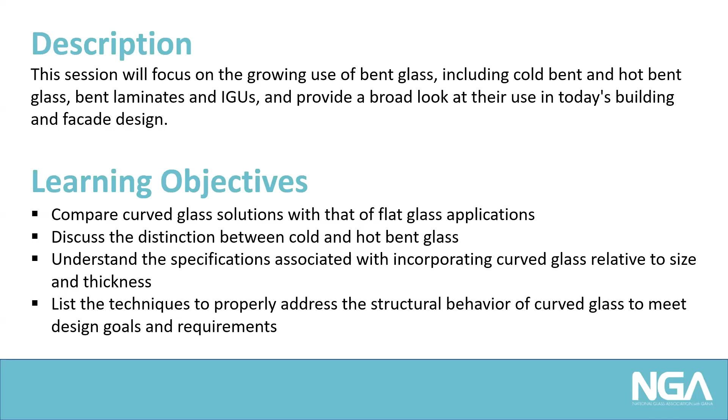So I don't claim to be a manufacturer of curved glass. I'm joining Enclos, which is designing, manufacturing, and installing curtain wall. So I only claim my passion for structural glass and all of its versatile uses.

So the glass we use in architecture is soda-lime glass. It's a very strong material and a quite elastic material. In terms of elasticity, it has the same Young's modulus as aluminum, which means if you want to bend a sheet of aluminum or a sheet of glass at the same thickness, it's going to have the same flexibility. However, it's not ductile like aluminum is.

It's produced, for architecture, into three types of product: annealed, heat strengthened, and fully tempered. As you guys know, annealed is what we see mostly around us in window glass, and fully tempered is a very fast-cool product which confers surface compression to the glass, making it much stronger, but also resulting in it breaking into small pieces, whereas annealed glass typically breaks in larger shards, which can be a good breakage behavior to leverage if desired.

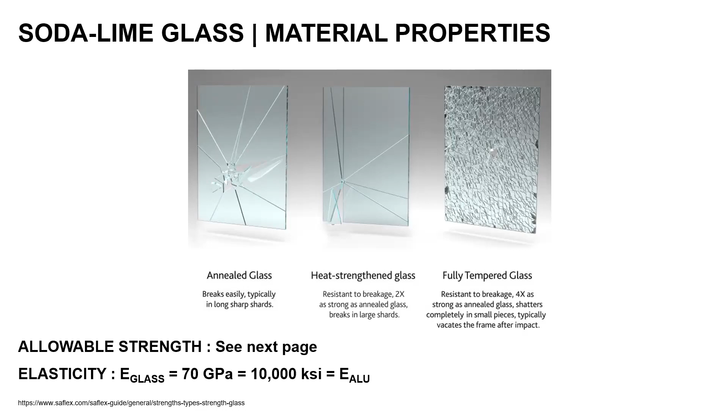So I'm always asked, what's the strength of glass? Well, here's this really beautiful table put together by our friends at EOC and dispatched into this NCSEA glass guide. And the answer is quite complex.

The strength of glass depends, first of all, on where you are in the glass, on the edge, on the center. It depends on the edge condition of the glass, how polished the edges are, not only of the edge of the panels, but any holes you may have or any funky cuts.

It depends on the duration of the load. What it means is basically the glass is this brittle material that has cracks, and so the longer you load it, the longer the stress you have on those cracks, and they slowly want to open. So a longer load is going to have a greater capacity to propagate those cracks and break.

It also depends on where it is in the building. Is it overhead? Is it like this general infill? So that results into an acceptable probability of breakage. This is where you have those left-hand side tables and right-hand side tables, and different acceptable stresses. So yeah, the strength of glass is a question that results in a very long answer.

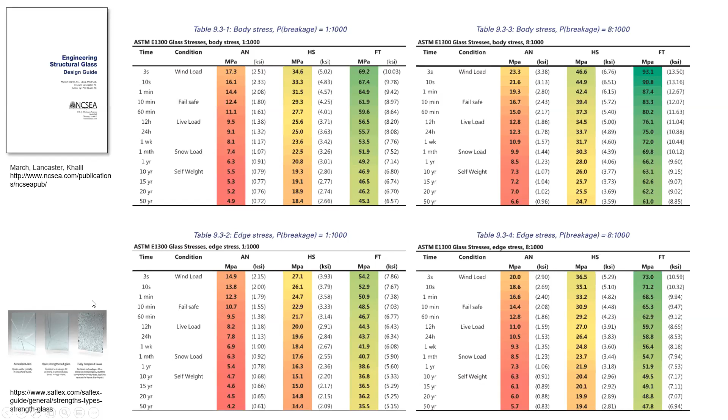Today I'll talk about, here's the map of what I will be talking about today: hot, warm, and cold bend glass. I like one pager, that's the way I think.

So on the hot side, which consists in actually melting the glass or softening the glass into shape, you got a slumped glass, which are called by certain manufacturers curved anneal, the gravity curved, that's made into a kiln. We'll get to, let me go over all of this. So you get slumped glass.

Curved tempered glass are done on those tempering lines that are shown here on the screen, and composed of rollers and rocking the glass. It's a bit of a lesser static behavior, or fabrication process sorry, but it results in tempered glass.

And as you saw earlier, you can leverage a lot of strength from that type of glass. Warming glass is called such because it leverages the interlayer to help forming the lites of glass. So it's called warm because of the temperature of the oven when you laminate those sandwich panels. I'll get to it in further details.

It's also called laminate bending, two-step bending, with all sorts of new things. It actually has a lot of names, but I prefer hot, warm, and cold. This is pretty straightforward, and that's what I call it.

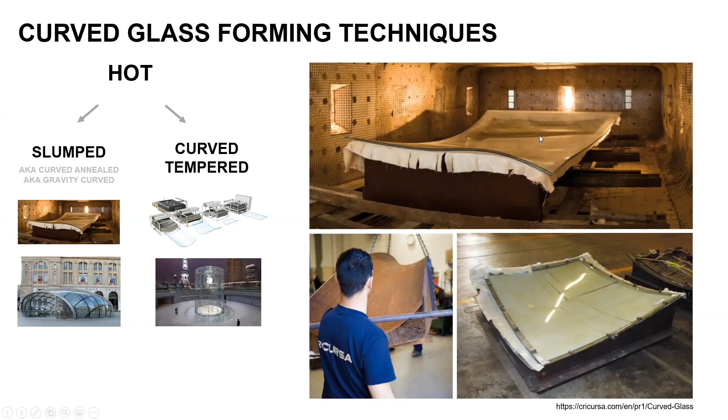It's very versatile. Whereas the next couple of techniques I'm going to describe are a bit more restricted because of the technology itself. There are many glass bending companies with this type of equipment, and they vary in size. That line allows you to shape the glass with the help of rollers.

So the glass is heated up and then put into this area that deforms and pushes the glass into place, and it's rocked into place. Then you cool it down - this is what's called quenching. Through all of those little nozzles you locally pull air into the glass, giving it a very fast cooling rate - going from, order of magnitude, 1,000 Fahrenheit down to room temperature very quickly.

That quick cooling provided by the quenching of all those nozzles is what gives the temper to the glass. The reason you need to rock it is you want to make sure you don't have static glass under a local nozzle, because if you don't rock the glass around, you might get local stress concentration, which you don't want for the structural performance of your panel, but also visual deformation due to those localized quenching marks.

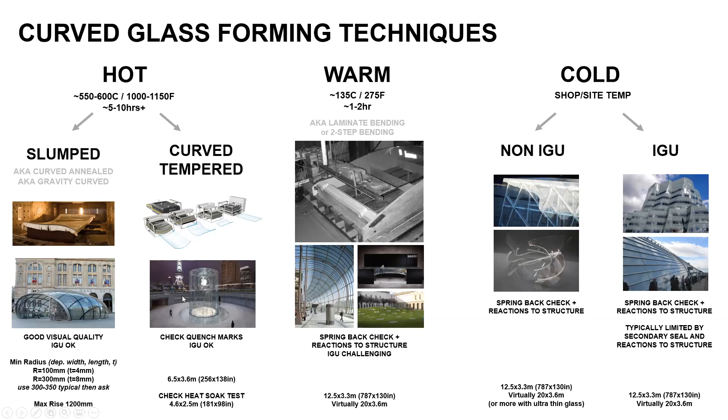That is also the technology that gives you the greatest panels available. If I go back to my first slide, you can get panels up to beyond 6 meters, and for certain applications even more. That also depends on other factors, like if you want to heat soak your system, or if you want to have some frits and interlayer and so forth. But in general, that's the technology that can give you the longest hot bend panels.

Warm bend glass consists of piling up sheets of glass and interlayer. You stack them on top of each other, throw them into a vacuum bag, clamp it into some sort of jig, then roll it into your autoclave and laminate it. When you've pushed the glass in place, you've elastically deformed it, and this is how the glass is shaped. But once the laminate gets out of your autoclave, it's the interlayer that prevents the glass from coming flat again. So there's a load transfer - each glass layer transfers loads to the interlayer, to the next glass layer, and so on.

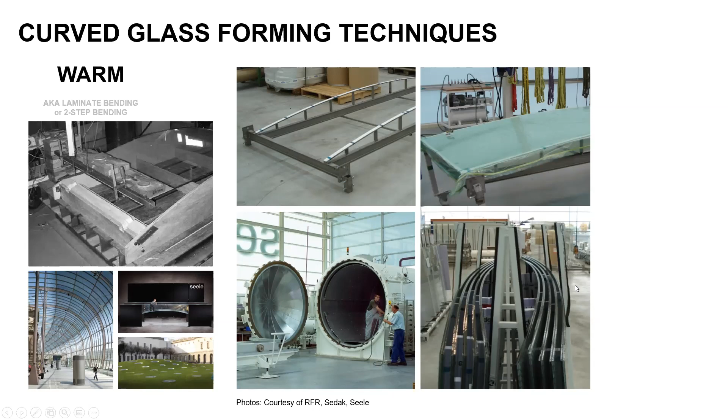That long-term behavior of the performance of the interlayer at the interface is critical with that technology. This has been used for the Strasbourg rail station in France - these are the panels right after fabrication, and these are the panels during installation. This is a system with internal spring-back forces, so you want to be able to capture them and understand how long the interlayer will maintain these components in shape. I did some research about it.

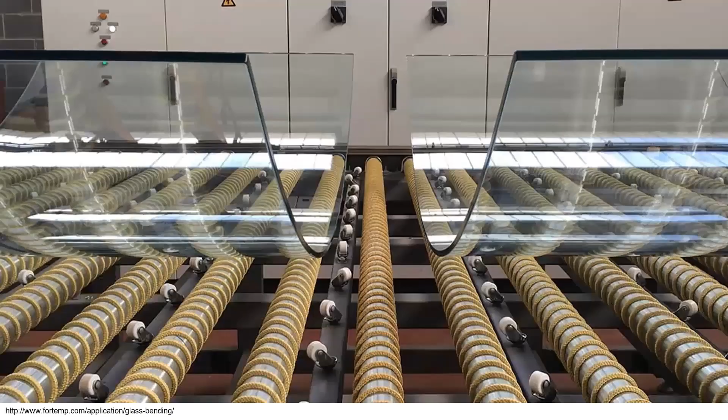I'll describe that down the line - looks like I'm still in the general presentation and not yet in the weeds quite there. These are the beautiful hot bend panel slides that were flying around, not where they're supposed to be. So let's wrap up the overall overview of the techniques and finish with cold bend glass.

Glass is this fantastic elastic material if you know how to design it, but it's quite often not the limiting factor - it's often going to be the components, the IGUs or interlayers, that might actually limit the performance. That's why I differentiate these into two columns here, because again, the glass is not always the limiting factor.

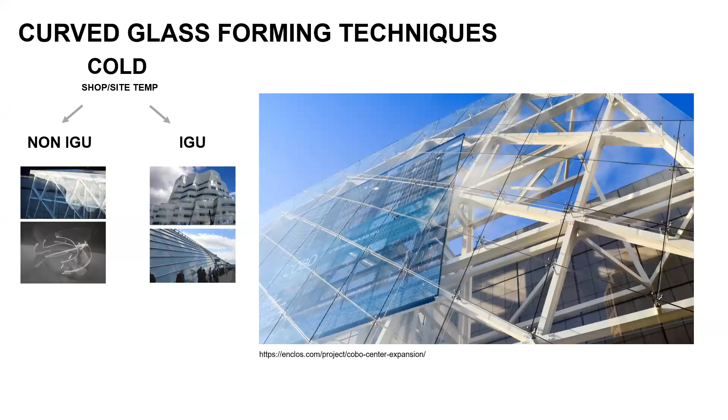Let me show you - that's the project, and the canopy is right there. This is the full canopy, and that's the detail I wanted to point out to you. This is the spider here that, by tensioning in and out, brings the glass in.

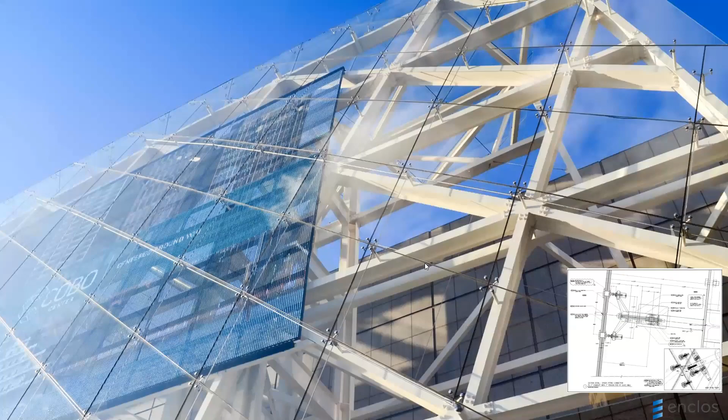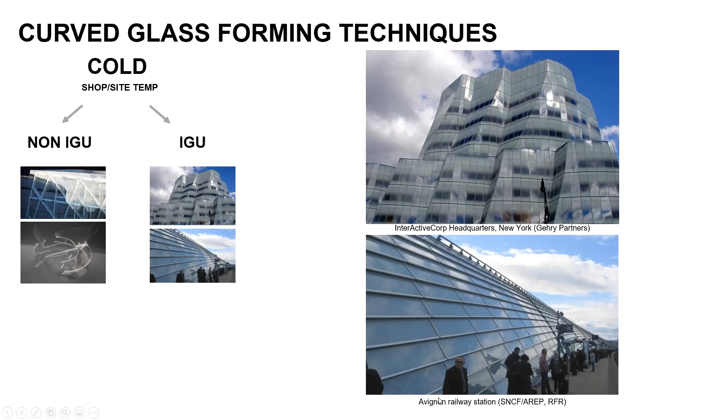This was a 1010 laminate with SGP, and that was basically pulled inwards by the equivalent of the thickness of one panel. But the second part of it is IGU. So there's some really cool work out there that has already been built, such as the IAC headquarters in New York City, or the Avignon railway station in France. And they leverage the capacity of the subcomponents of an IGU to actually maintain the state of this shape.

And there's this really sweet research by Sika, and also all that good work that has been presented at GPD in the past couple of years that shows basically the limitation of cold bending and IGU.

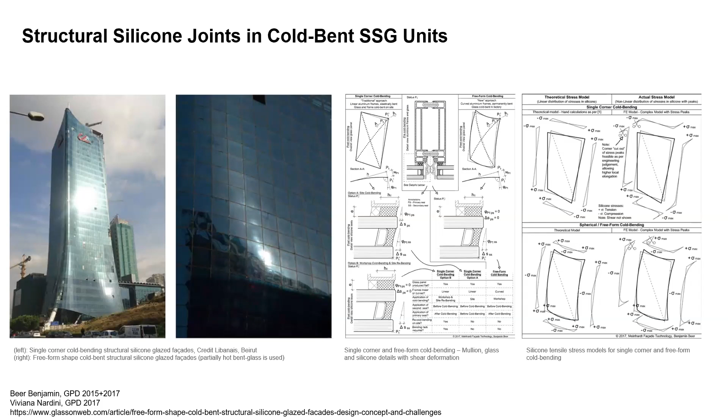I invite you to go read that paper, but if you only remember one limitation in geometry here, it's no longer the glass and what we saw in terms of shape and capacity of the glass manufacturers, but this is the capacity of the secondary seal, or any structural silicone joint, to maintain long-term loading. These materials are not really good at maintaining long-term shear out there, so they just need to be sized adequately. And so that could be a limitation for the freeform facade that you might want to panel with glass.

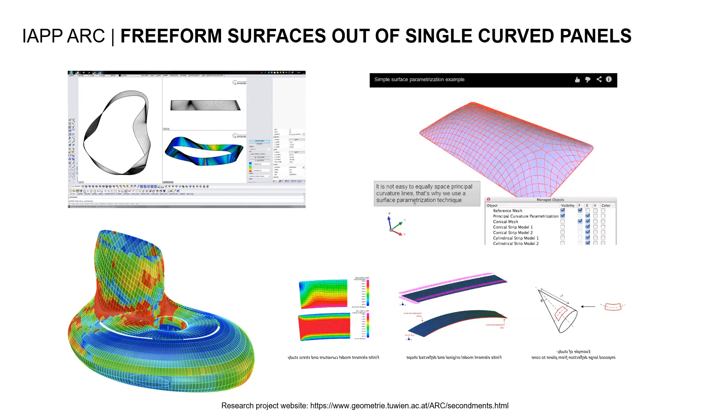So before I moved to the US, I was in France at RFR. I was seconded to the University of Technology in Vienna. We had a partnership, so throughout the last two years of when I was there, I was in and out of some specific tasks for this research, where we looked at paneling of freeform surfaces with single curve panels. That partnership was with not only the University of Vienna, but also Evolute, who are doing this plugin for Rhino. And looking into, my work was looking specifically into cold bend glass and warm bend glass.

So I've developed an internal tool to look at the loss of shear bonds in the long-term loading of laminates. Basically, in the short term, a laminate behaves like a full, close to full, if not quite good composite. And in the long term, there's a loss of shear at interlayers, and this is what I studied.

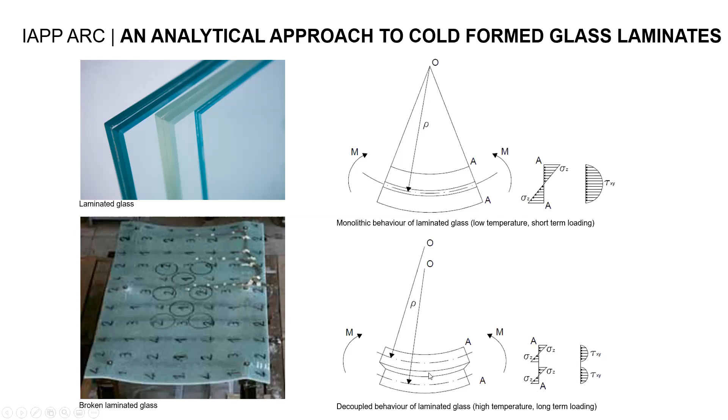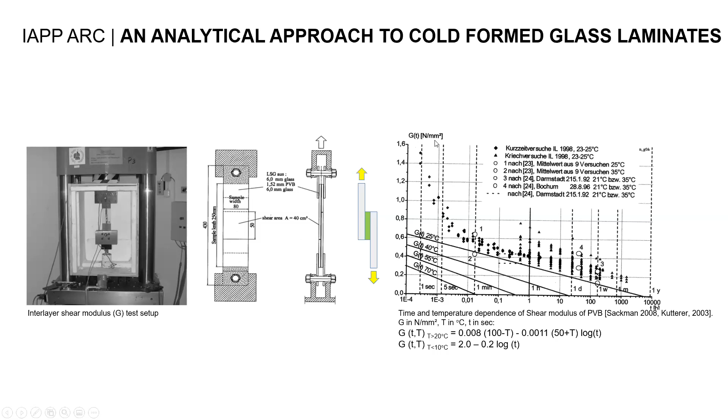So how does all that we know affect glass design and paneling in the long term? I retrieved some data on long-term shear behavior of interlayers. So basically, a very long creep and loss of mechanical property.

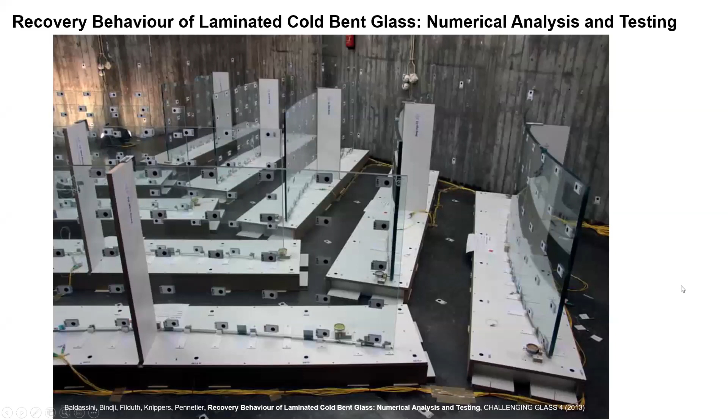That same project followed my numerical analysis with some testing that was done at ITKE in Stuttgart, looking at how these curved laminates reacted throughout time. So you can go out and find those papers. I'd be happy to share them with you if you just email me.

We looked at multiple types of laminates using PVB, SGP with 2 or 3 plies. And as you see in this graphic, the loss of stiffness of the interlayer has a reciprocal effect, a flattening of those compounds. So again, these were fabricated in cold bend technique. This is what people call laminated laminate bending.

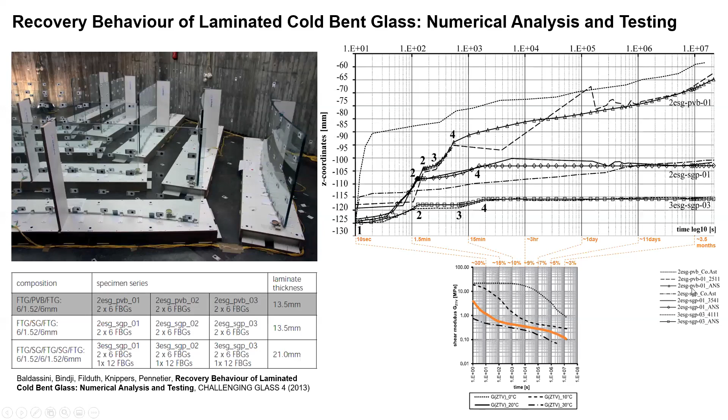So typically we saw that PVB interlayers became super flat again after basically just a couple minutes, but that was something that could be leveraged if you had to just place it as an intermediate installation sequence. That could be quite interesting to leverage. But in the long term, the SGP interlayers and SGP laminates behave much better. So I invite you to go look into more details and ask if you have any questions.

And that same work was exhibited at glasstec in 2014 at the booth of ITKE, who did the testing that was financed by the research project I was part of. And you could go, for the lucky ones that were out there, see live how much stress you were imposing on the glass, and how much stress was

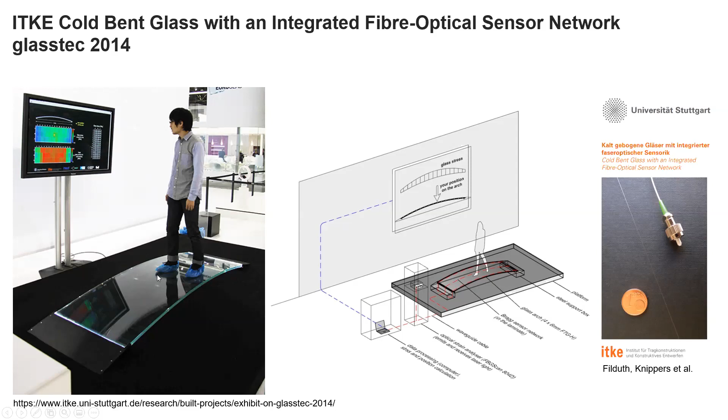left into the system. Another really cool body of research, still by the Vienna University of Technology, with whom I was working, is this paper that just got published at SIGGRAPH this year, with the latest advance of the tool I worked on, or actually contributed to, humbly and minimally.

This tool enables live modification of the geometry of the freeform surface you're trying to panelize, and a study on how it can be achieved with various specific constraints. The ultimate goal that I was helping with was to try to bring the mechanical material constraints of the material right there.

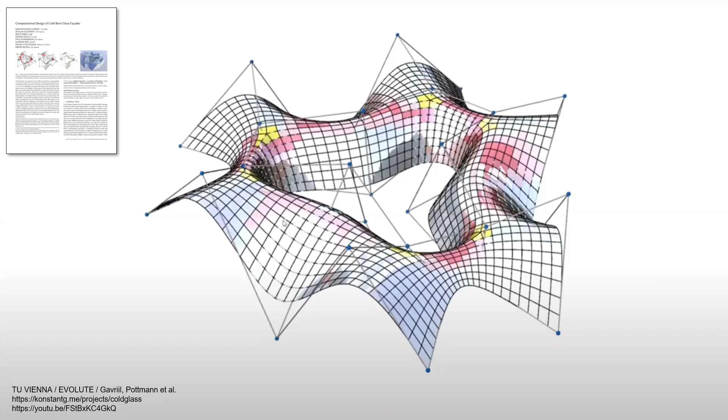They're also looking at those geometrical constraints. Are you looking at single curvature, double curvature? If it's double curvature, as I said earlier, you can achieve it with warm bend glass or some very limited warpage of the cold bend glass, etc. So that's quite a cool tool, and you should reach out to them if you have any questions.

They're also looking not only at the geometry of the panels themselves, but also the kinks at the interface between panels of different curvature. So that can be quite interesting as well.

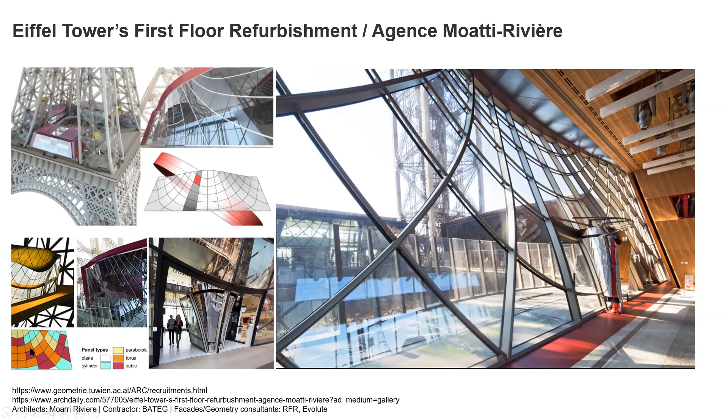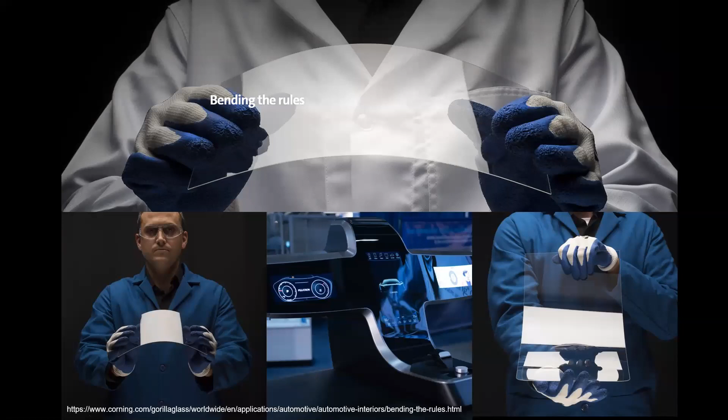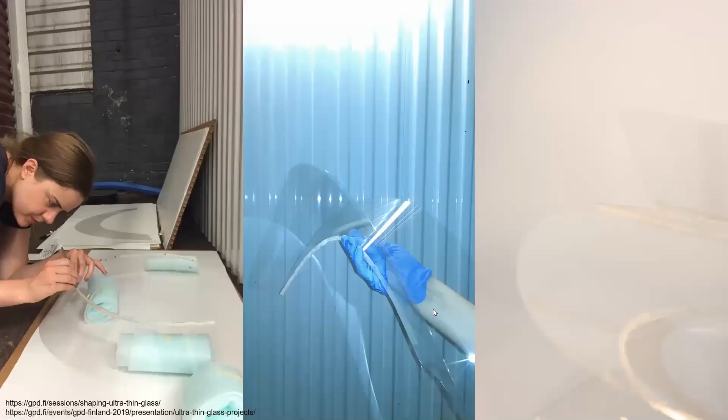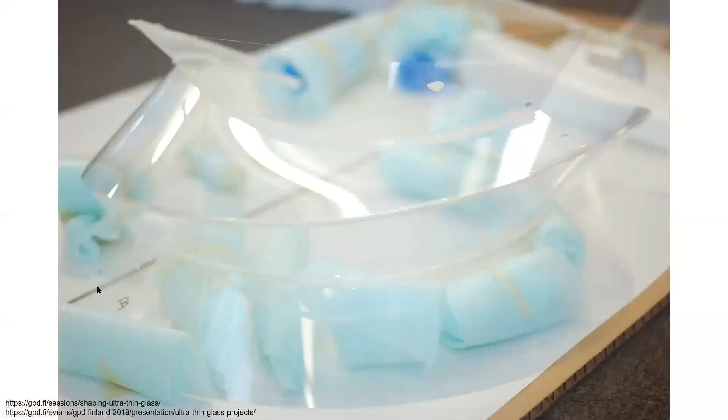And I have been working with this material on a little sculpture, and you can go into the GPD presentation to hear more about it. But looking at how, when we leverage the flexibility of the material combined with a geometry that's corrugated and that as an assembly provides some stiffness, we can achieve geometries that are quite atypical for glass.

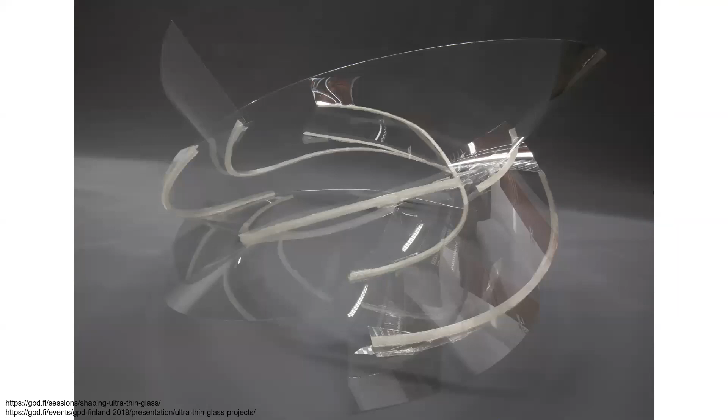So this is the final product, and this is the product after a really hot and tough summer, after a bit of breakage. But I think that scale is interesting for prototyping, for thinking differently about curved glass. I think it can also be used in lightweight systems such as skylights, or integrated into all sorts of other glass products or compounds such as IGUs, etc.

So with this, I'm closing that presentation on glass curving. I hope I blasted enough ideas to open the conversation, but also to show you that it is not a very simple answer. What's the size of glass? What's the type? What's the strength? Because there's a lot of parameters to be taken into account.

But what I hope I've conveyed is that there's lots of research happening that is broadening the scope of curving technology that's out there, and also the potential for not only expanding today's manufacturing capacity, but also rethinking how to combine different types of technology and incorporating it very early in a design so that it can be leveraged early and bring those visions to life.

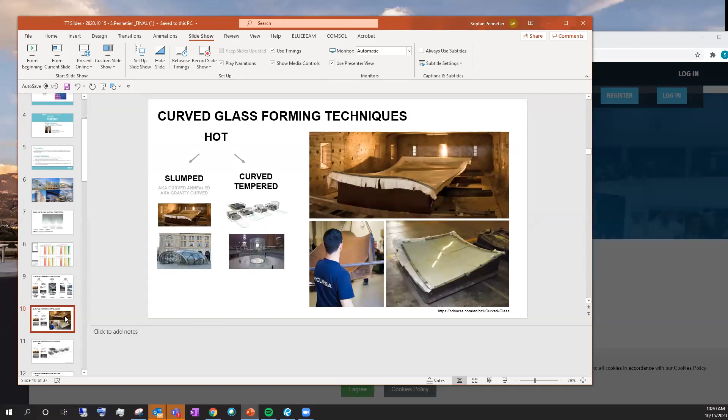Sure thing. So there are multiple thermal stresses, and maybe whoever asked the question can chime in. In terms of the residual stresses, or external loading on glass, that's something I'd be quite interested to hear the background behind this question. But this is a very broad question, actually.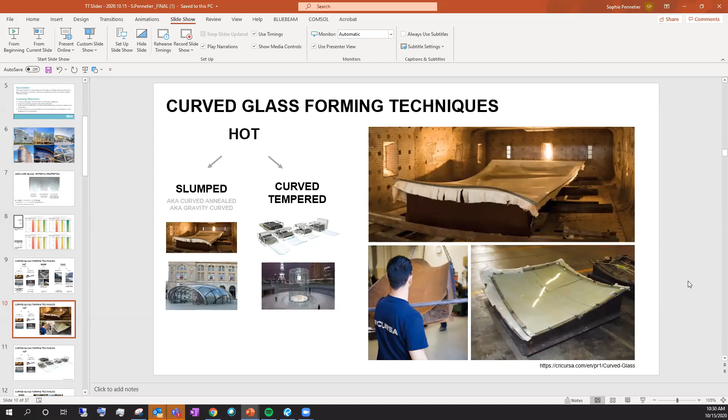So if we're talking about differential cooling stresses happening at a differential rate into the glass, that can indeed induce a lot of stresses. In terms of thermal loading in the long term of a monolithic lite of glass, this is something that can be quite easily modeled in FE.

So you know the orientation of your glass, the source of thermal loading. But the most important point is the detailing, making sure you allow your glass to be able to expand. If you don't do so, or don't have the right capacity of the glass to sustain those stresses, this is where you have a risk of breakage.

So typically, if you know you have a pretty high thermal load—for instance, if you're on a south facade and you have a black frit or something quite opaque that induces a pretty high thermal load on the glass—you want to make sure you have enough residual compression capacity. So you want to go with heat-strengthened glass or fully tempered glass that can sustain the thermal stress. But again, it goes two ways: you make sure you first detail it accordingly to let the glass expand if it needs to.

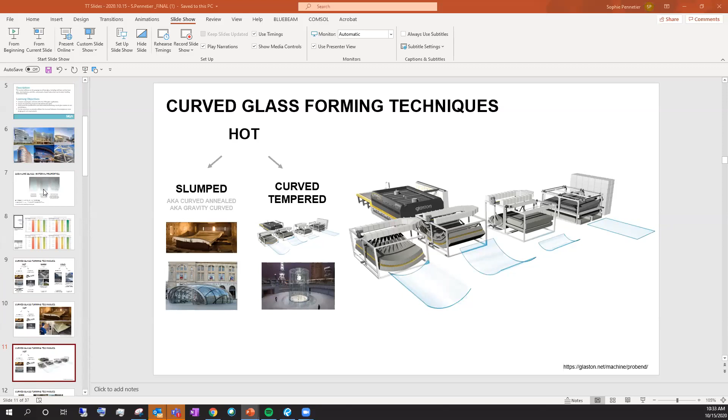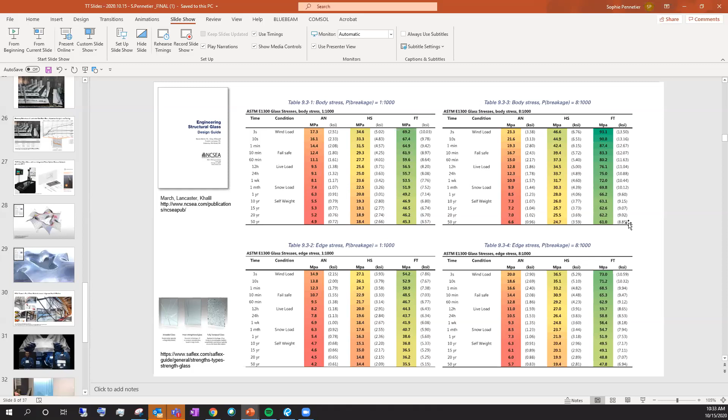First of all, you can laminate anything, literally anything, any material or type. So laminated glass is not a fourth category. When you start laminating those types of products, you want to understand their different capacities, and you want to see how much load you transfer between one lite and another when you calculate those things.

So yeah, you can use cold bent glass with any type of glass. Basically, you just want to make sure you don't reach the capacity of any of the substrates or any of the plies you use.

Okay, great. Another one: what software do you often use for bent glass analysis? I personally use Strand7, in Europe it's called Straus7. It's a very good software, and the meshing capacity is the part I love the most. It's quite better than other packages, but you can use SAP2000 or GSA as long as you've got the right tools.

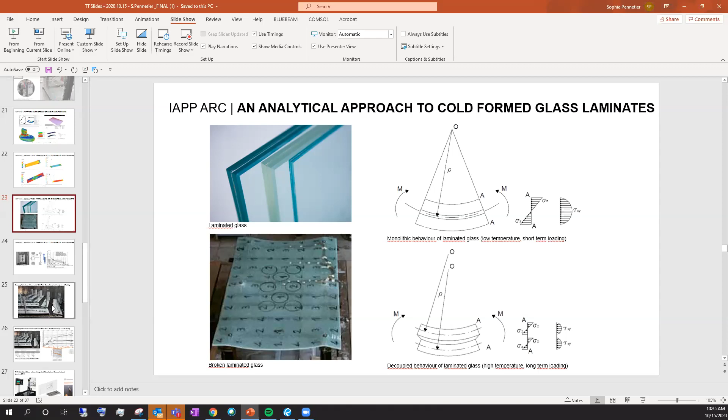You can also use ANSYS. Actually, some of the work we used for that research, we used ANSYS and Code_Aster. So it's quite versatile. You just want to make sure you've got the right meshing tools, if not embedded in the software packages. You also need nonlinear material capacity, because you want to be able to vary properties of material if you have to, and capture the history of loading as well, so being able to do a staged analysis.

Okay, great. Another question, this one regarding IGUs. Can you comment on pressure due to climate loads and how that impacts IGU stiffness?

Yeah, so climatic loads, I'd be curious to see if the person is thinking about wind loads, thermal loads, or isochoric pressures. There's tons of good stuff out there, and there are a lot of really good papers.

Isochoric pressures, yeah, that's a very good question, and there's some other good work I can point you to. But in a nutshell, you've got this gas volume in there, and when it's heated up you might get those isochoric pressures, and that's an extra load you need to add onto your long-term shear of the subcomponents making up the IGUs. That's something you can totally model in Strand7 actually. So I'm not too sure what's the problem in there, but yeah, definitely you need to integrate it into your analysis. That's for sure.

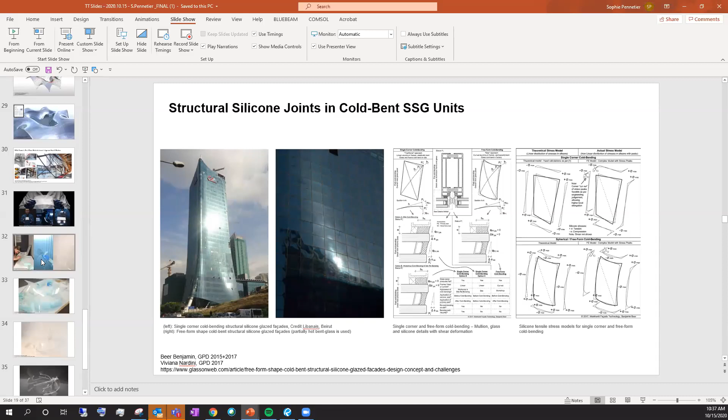Sure thing. I actually didn't work with Gorilla myself, I worked with Willow Glass, which is a much thinner product. Gorilla is in the range of 0.7 millimeter, so 700 micron. The Willow Glass I've been working with on my sculpture comes in multiple thicknesses, but predominantly 100 and 200 micron. These come in long spools 4 feet wide, so 1.2 meters, and roughly 300 meters, so that's virtually infinite.

I invite you to go read some of the papers I've put out there, but you can cut it as such. The Gorilla Glass itself is tempered, so if you try to cut it after it has been fabricated and chemically tempered, you might run into some problems. That's not the case for the Willow Glass, it's ultra thin glass, so you can basically just scribe and break it the same way you break your bathroom tile. That's pretty much the way you work with annealed glass, because it doesn't have residual stresses.

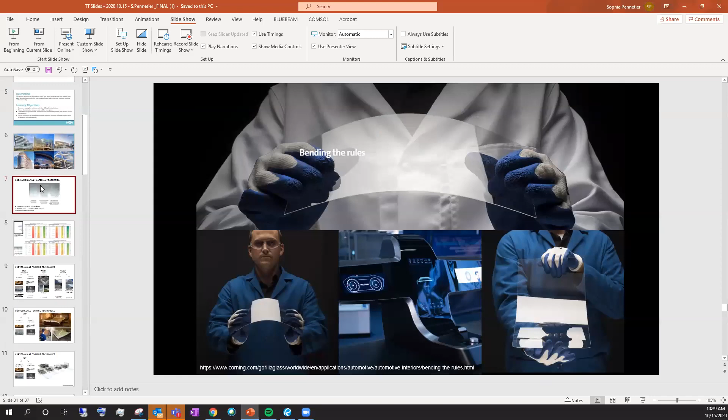The Gorilla Glass can be machined, you just need to do that before chemical temper. I didn't mention chemical tempering of the glass out there. It's an extra processing you can have on glass that provides the capacity of, or beyond, a fully tempered glass, but with a breakage pattern that's in greater shards so that you don't have those types of problems. It has its own limitation on how much the bath can take.

It's up to you if you decide to use the chemical tempering processes. That is a staging issue, as I said, requiring all of your machining and holes to be done before the chemical temper.

Okay, great. Maybe one more technical question and then a couple of future trend-based ones. Do you monitor the Gare de Strasbourg, and how well does it age? That's a really good question.

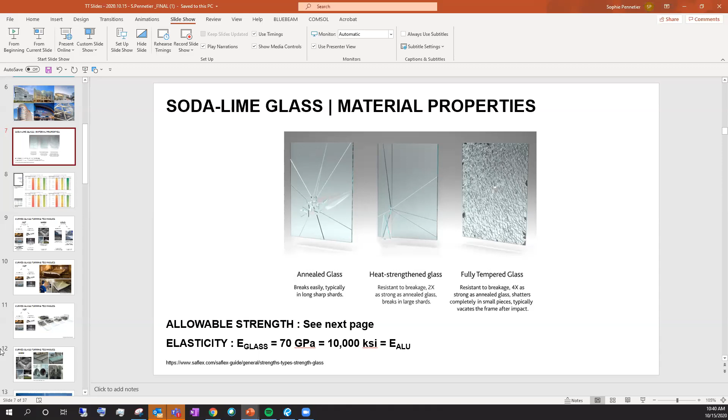I do not know. One thing that we all know is happening is a load transfer between the cold-bent glass and the supporting structure. But this has been designed to have a full load transfer to the structure. So basically, whether it was curved in the shop or on site, the capacity itself is capable of sustaining all of those stresses.

Basically, we're talking about polymers there. And when you look again at my little graph, there is ultimately, in a very long time, if you shrink this logarithmic scale, you're going to go back to flat again. The question is, when does that happen? Does it happen before installation or after installation? But you can't assume that the interlayer is going to withhold that stress forever. I do not think it's wise to design like that.

I've not seen it myself, but I think we need to have resilient structures that can take all of that load in case the creep of the interlayer results in the full drop of its mechanical properties in terms of long-term shear.

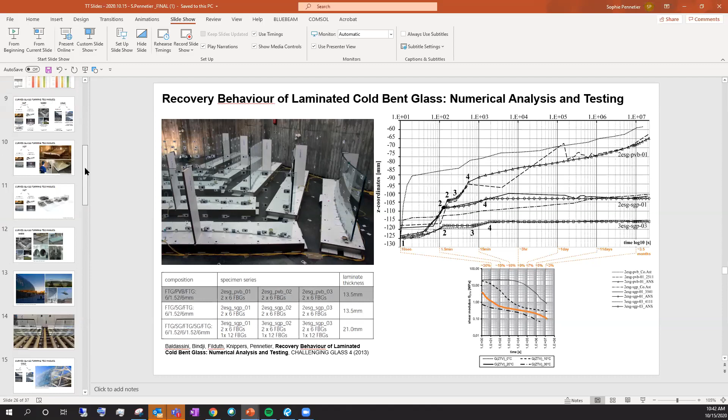So no, I look forward to hearing if there's anything coming up. I haven't heard anything coming up on Strasbourg. Something to be noted though is that they're not IGUs, they're just two-ply laminates actually, so there's less component to be wary of. There's no primary, secondary seal things happening. So for that specific type of curving, I think it's a wise design strategy.

Okay, great. Looking ahead, what does the future of bent glass hold, considering we're using bigger and bigger panels? Which method, cold versus warm versus hot, is ideal once you move to jumbo glass?

I think it really depends on the geometry, the intent of the geometry. It's a hard question, but if you have really tight radii, or compound radii, you're down to a fabrication technology that's more manual, and as it should be for such glass.